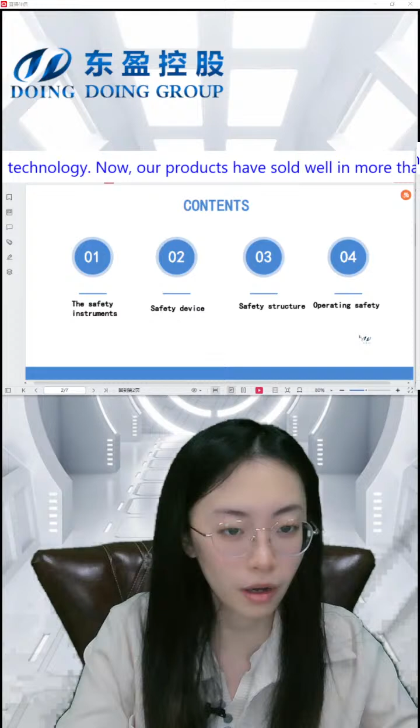Okay, let's have a look at some safety devices. We have 4 steps: the safety instruments, safety devices, safety structure, and operating safety. These 4 steps ensure we have a safe environment for production. The first is the safety instruments.

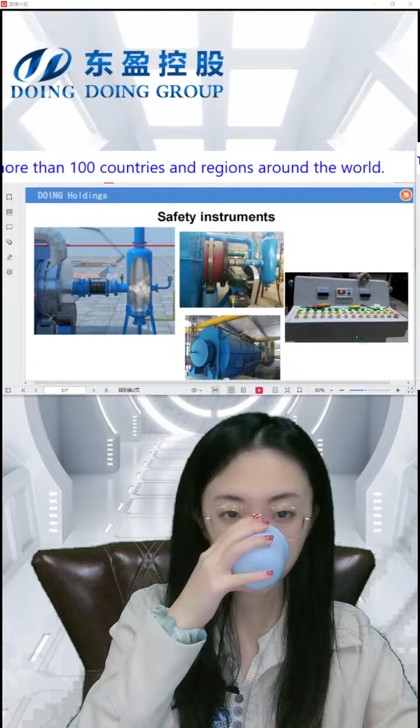Like this, this is a tube, because the gas at this outlet can move randomly. So the gas will just run randomly. So this is to control it, to protect the temperature and the pressure. And then the gas will come out from the outlet, come to the tube, then it will come to the buffer tank. The buffer tank slows down the speed to ensure it is not very fast and it can surely be condensed.

And then this is a generator, and this is the guide of the rotary furnace. Well, this is to ensure it works in one line, so there is no pressure and no release of the gas. And you can see the tube. The tube has a globe valve. This is different from the tube in the feeding system, because the gas will move randomly. So we need this valve to control it, so it doesn't escape from other places.

So these are some safety devices that you can compare between our design and other manufacturers. We are different because there are some different designs to ensure different qualities and a different safety environment.

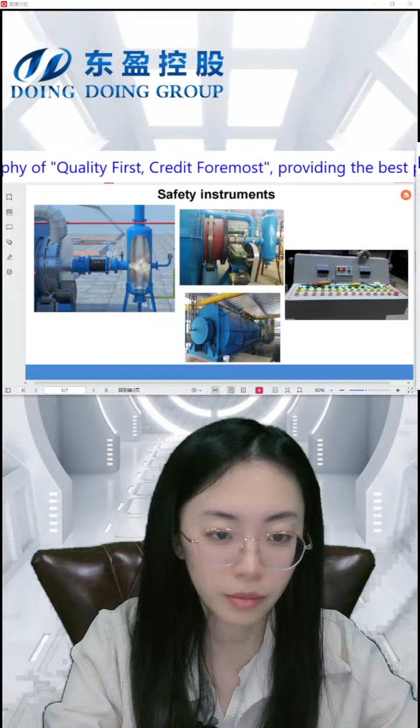And then we also have this purification system. This is a control panel, a PLC system, to ensure all the production is in controlled data, a controlled environment. So if you want more automatic equipment, you can buy this control panel. Well, this is an optional device.

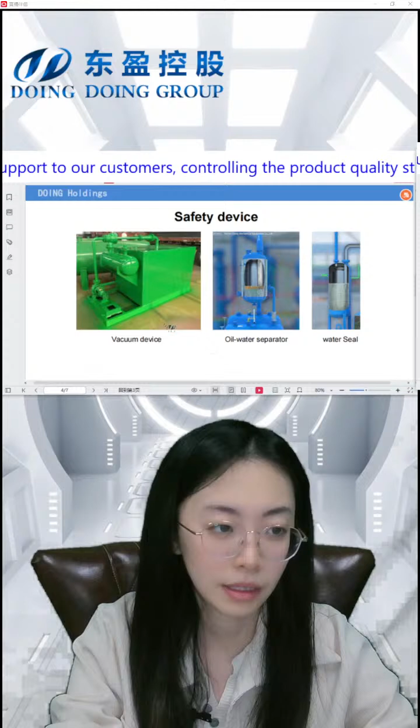And here are some different safety devices. For example, the vacuum device. Well, this is one of our patents. Because if you are familiar with this business, you may know that it is a very serious problem that some production may have a flash explosion. So we needed to solve this problem, and our engineer developed this vacuum device.

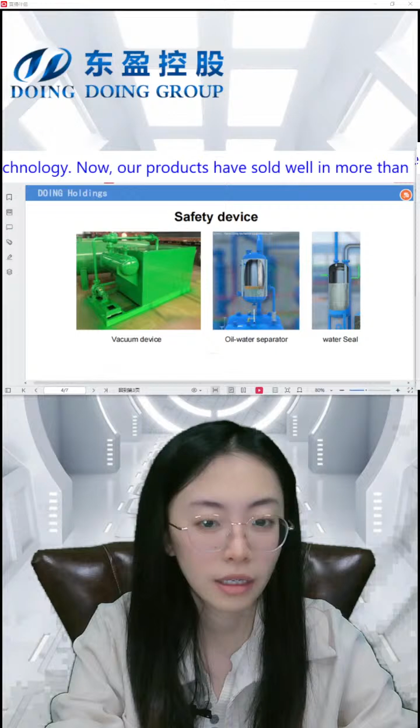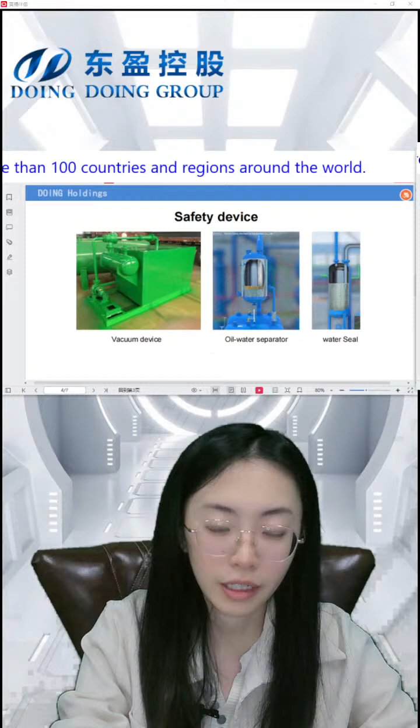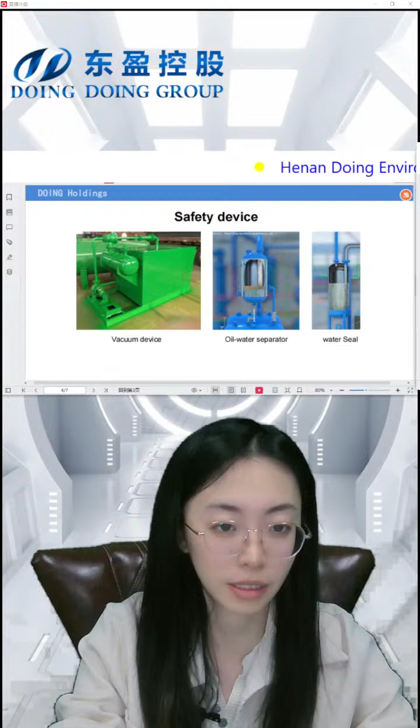This is to prevent the flash explosion by using 1 hour or half an hour to pump the flue gas released in the furnace to the purification system and the desulfurization system. And then when we open the feeding door, the discharging door after pyrolysis, no flash explosion will happen. This is why we have this vacuum device.

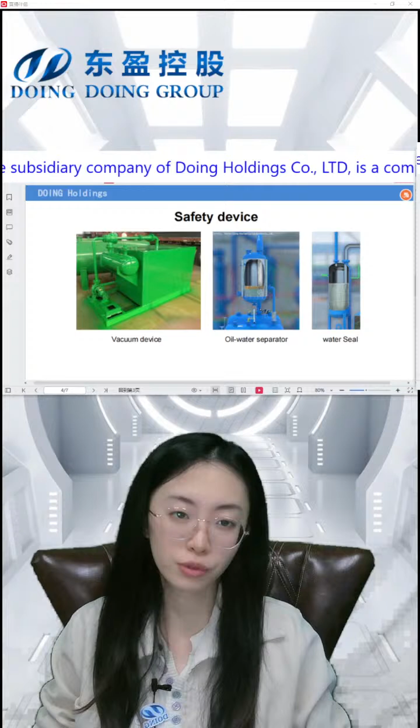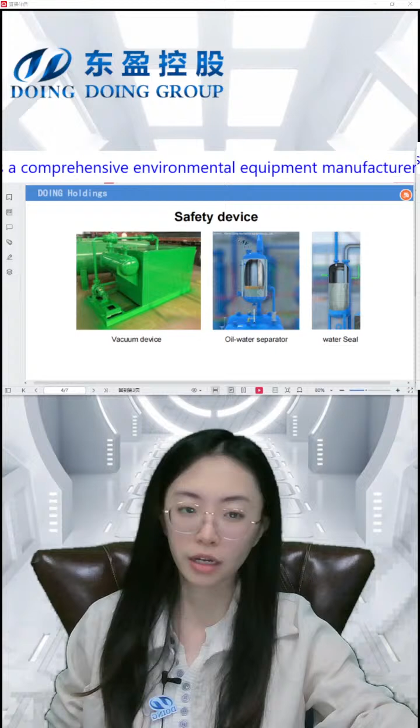And then the second is the oil-water separator. Well, it's also one of the condensation devices, but it also has the effect of controlling the safety environment. It's very similar to the water seal. It is a kind of water seal. The only difference is it has a water cover outside to condense, but inside it is the same. The oil-water separator prevents the gas from coming back to the front side of the device, which would cause safety problems like explosion. So this is what the oil-water separator does.

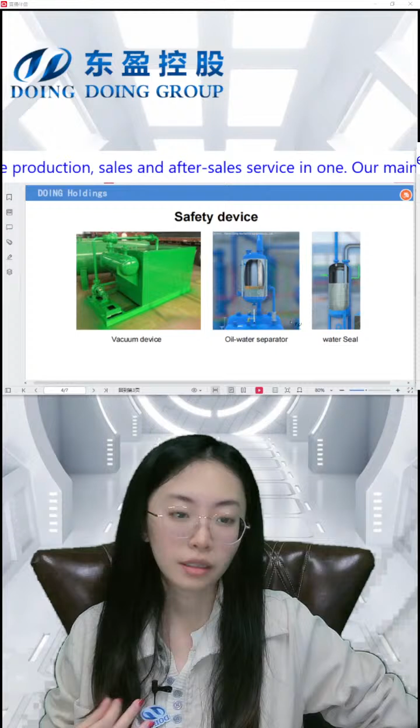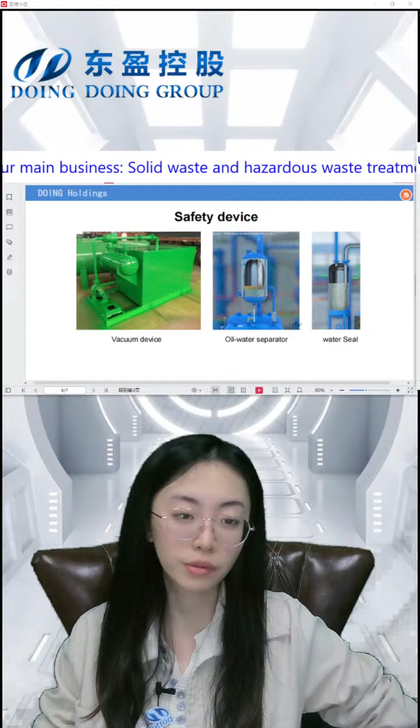First, it is a safety device. Second, it is a purification device and a desulfurization device. The oil gas will come through the water to purify the gas, to remove the particles and the dust. This is the water seal.

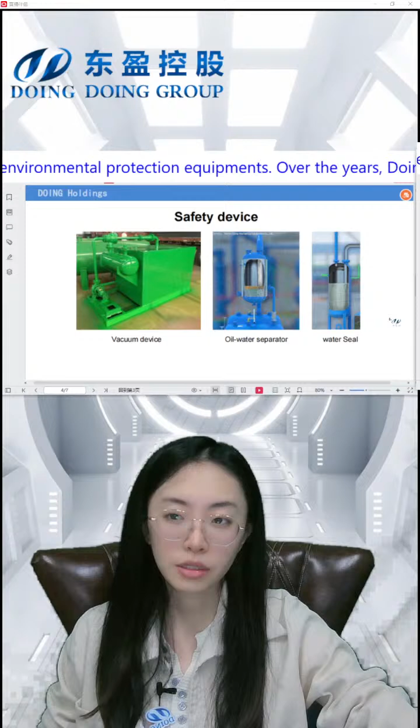And then this is the water seal. By just using the water, we prevent the gas from going back to the front device, to get a safe environment. These are some of the safety devices.

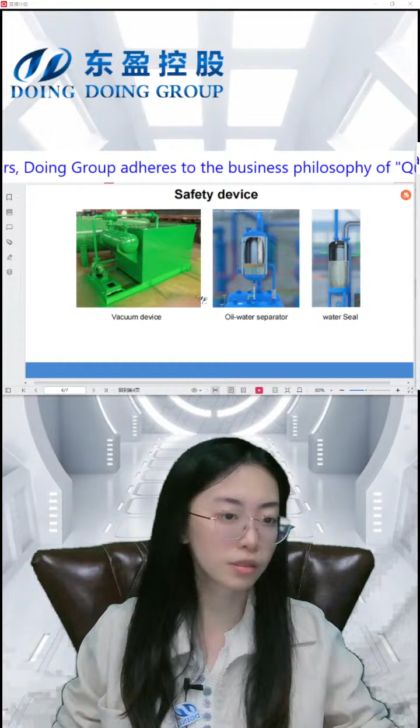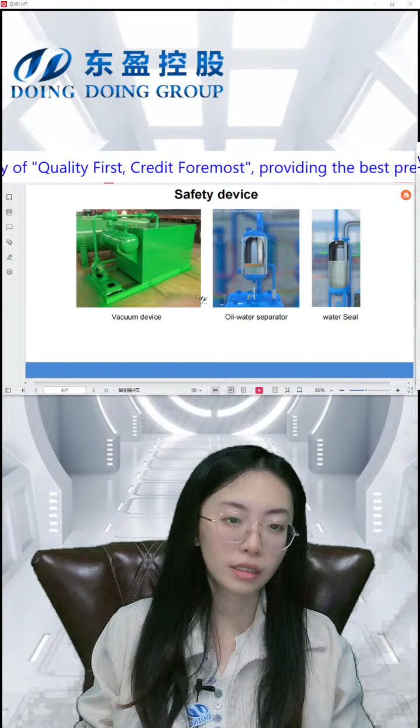Also, we have other safety devices like the temperature monitor, pressure monitor, the alarm bell, and the automatic gas pressure release device, just to ensure we have a safe environment and don't have serious problems.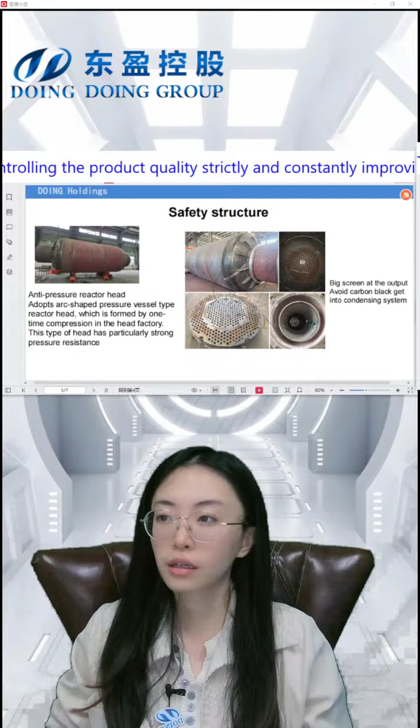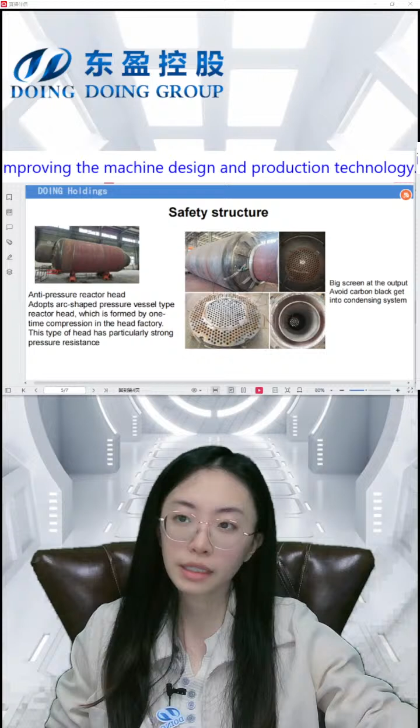And here is the safety structure of the furnace. You can have a look. This is the furnace material that we use. We can use the boiler plate or the stainless steel. The red one is a boiler plate, and the white one is the stainless steel.

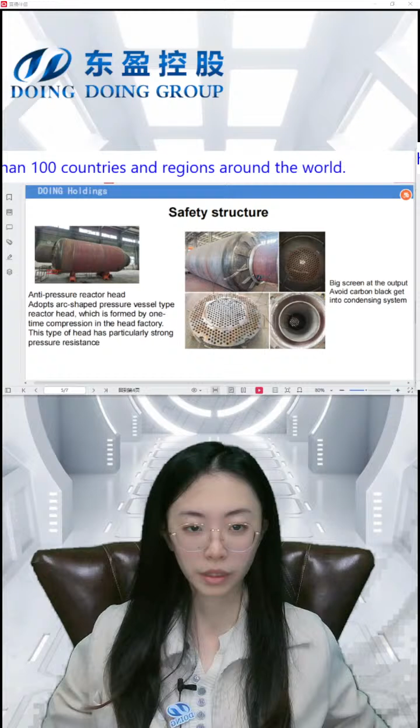Because different raw materials may have different states, and some of them may be corrosive, we need different materials. But the design is the same, to have a long service life and avoid problems of cracking, explosion, or random release of the gas. So we have this furnace, as you can see.

The anti-pressure reactor head adopts the arc-shaped pressure vessel type reactor head, which is formed by one-time compression in the head factory, also in our factory in Henan province. This type of head has particularly strong pressure resistance. This is to ensure the temperature and the pressure.

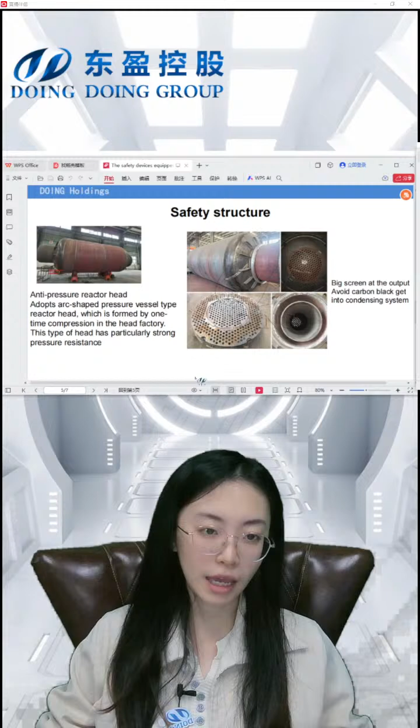And then this at the output avoids carbon black getting into the condensation system. If the carbon black comes out to the condensation system, it may clog the tube inside, because the tube is very thin. The purpose is to spray the gas so it can touch the cooling water more efficiently. But if the carbon black also comes to the condensation system, it may clog and cause safety problems.

What is this? This is the equipment of the waste tire, waste plastic pyrolysis plant. We can recycle waste like tire, plastic, oil sludge, and coal tar sludge by using the pyrolysis equipment, and we can get the fuel oil, the carbon black, and the steel wire from it. So this is what our equipment can do.

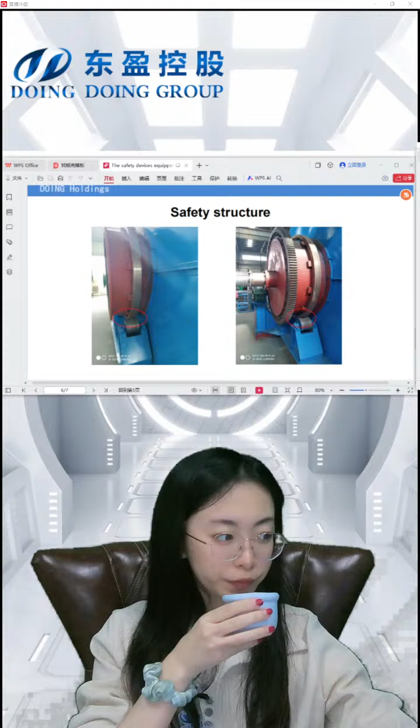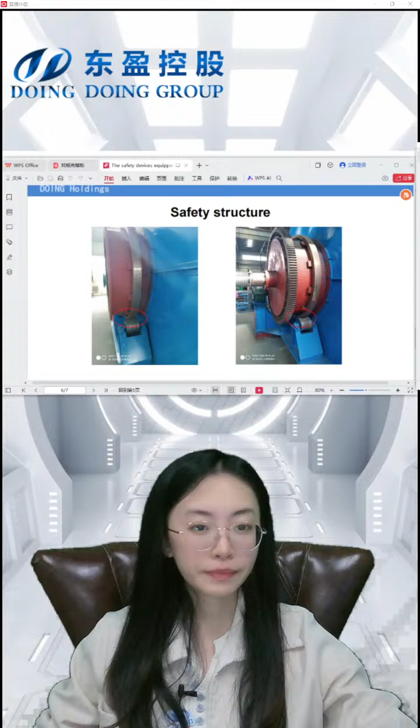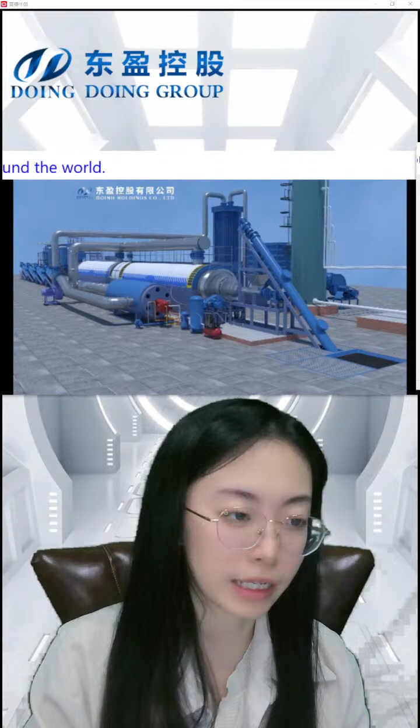Okay, and then let's have an introduction to the different kinds of equipment. We have 3 kinds of equipment: the batch type, fully continuous, and semi-continuous. They have different designs and different advantages. Let's have a look. This video explains our fully continuous pyrolysis equipment, and this is the feeding system, cooling system. This is the pyrolysis system, and this is the purification system.

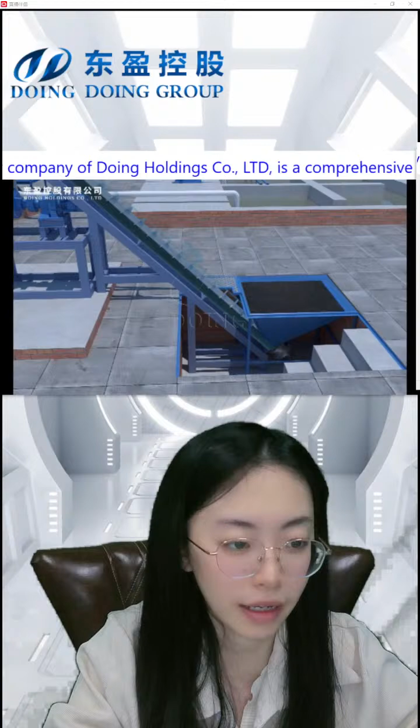Rubber powder with a diameter of less than 1 to 2 millimeters is conveyed to the horizontal feeding auger by the rubber powder lifting screw conveyor here, and then conveyed to our reactor for heating.

This is the furnace. The furnace of the reactor adopts the indirect heating design, with flame heating air, and the air heating the equipment. This not only protects the reactor inner body and prolongs the service life of the equipment, but also heats more evenly. And this is a hot wind furnace. Also, the purpose is to get the heating energy more evenly.

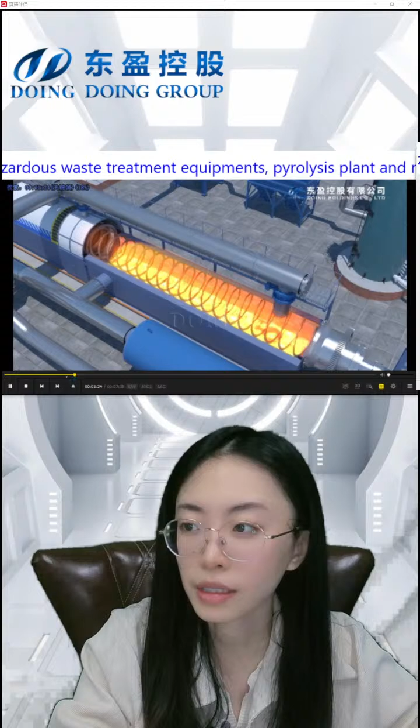You can see this furnace; we changed the traditional burner system. Previously our heating system was the burner and the tail gas burner. We use this new design, the hot wind burner, which has the advantage of uniform heating. And there is an optional semi-automatic or automatic control system, so it realizes automatic temperature control, pressure control, and fire control. It's more convenient and more efficient.

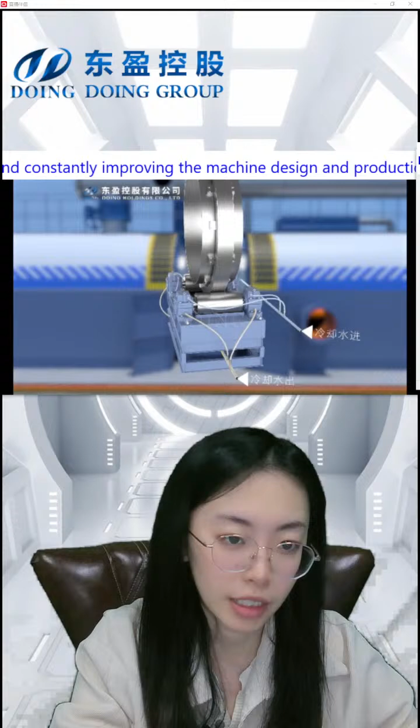And there is a cooling circulating water device here under it to cool the lubricating oil, thus protecting the supporting wheel.

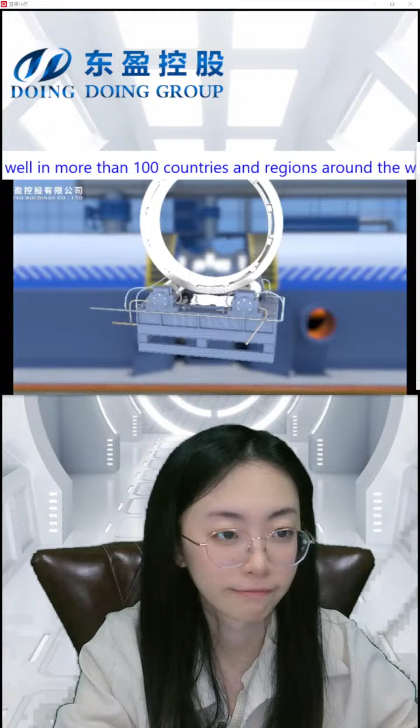And then the back of it is the gas outlet. You can see here, the green part is our fixed section, through which oil gas enters the buffer tank upwards, and the carbon black falls back to the slag discharging system from the bottom. And this is the buffer tank, which is used to slow down the gas and to precipitate the impurities.

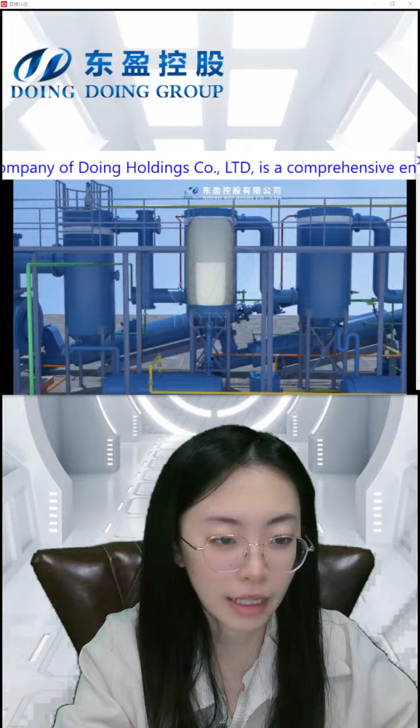And next, we come to the buffer condensation tank. We have 3 buffer condensation tanks to further precipitate the impurities and to have a buffer effect. Outside is a water jacket, which is for the condensation effect. The water covering outside is to cool down this flue gas. This is the U-tube design, which is used to balance the pressure and prevent oil gas from entering the oil tank during pumping. We have the 2-ton oil storage tank.

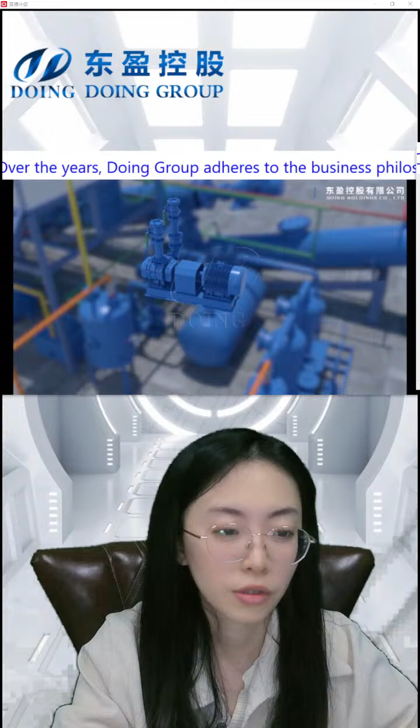And then we come to the vertical condensers, which are used to increase the cooling area and to ensure all the oil gas is cooled down. They have several tubes inside. We have 3 vertical condensers. And then the gas will come to the water seal to prevent the tail gas from flowing backwards.

And then all the gas is condensed, but we also have some gas that can't be condensed. It comes to the optional environmental protection device, the tail gas desulfurization equipment. This is if you want to reuse the tail gas that you produced; the gas can be the heating energy. It can save your extra heating energy, but we need to purify it, or it has some bad smell. So we can have this tail gas desulfurization system. It's also our patent.

Inside is circulating water containing sodium hydroxide, which reacts with the tail gas to remove the hydrogen sulfide. Here is the buffer tank, and then these 2 spraying towers will spray the sodium hydroxide.

We use extra tail gas to generate electricity. Our tail gas power generator system heats the boiler with purified tail gas. And the steam generated by the boiler supplies energy to the equipment through the steam generator. It can improve the utilization rate of the tail gas, save heating fuel, improve efficiency, and reduce the operation costs.

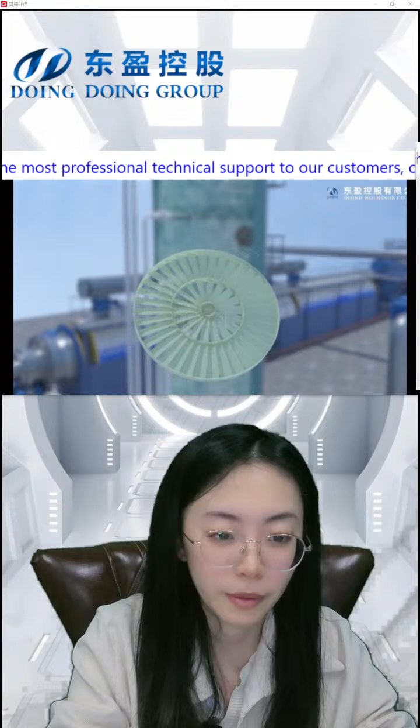The flue gas has been cooled to below 120 degrees when it enters this part. This is the air equalizing device, and this is to disperse the flue gas and make it contact with the spraying tower mist more evenly.

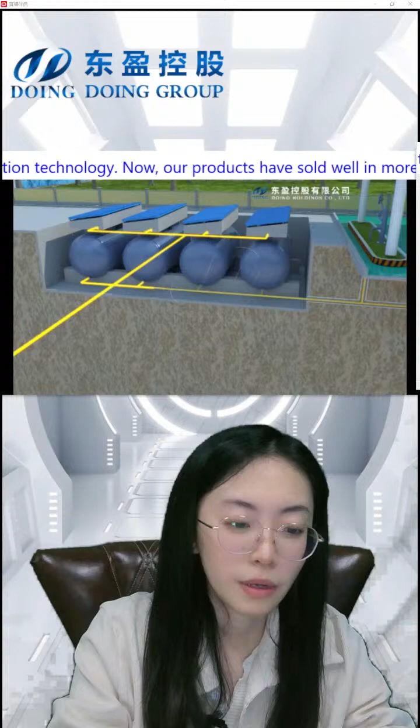And the last is the automatic oil pumping system for the fully continuous equipment. We can collect the oil, then we can load it directly, or we can use it as heating energy at glass factories, brick factories, or other kinds of factories. So this is what our equipment can do.

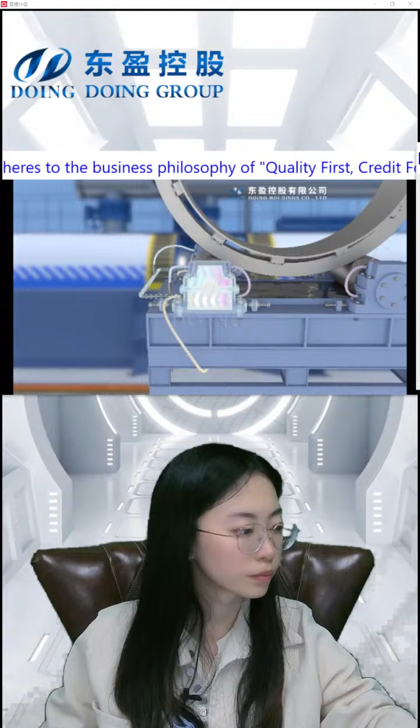Okay, now let's have a look at the semi-continuous pyrolysis plant. Let's give you some 3D video and pictures to know more information about this.

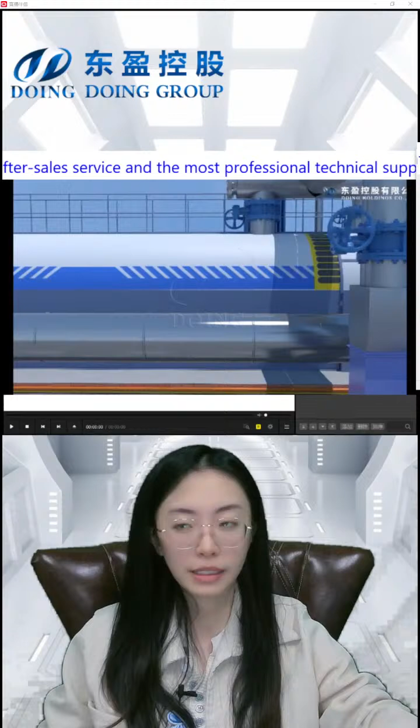So you can see here the production line of the semi-continuous equipment. We also need some pre-process to crush the tire into particles. The rubber blocks will be a diameter below 30 millimeters, and will come to the reactor through the feeding screw conveyor.

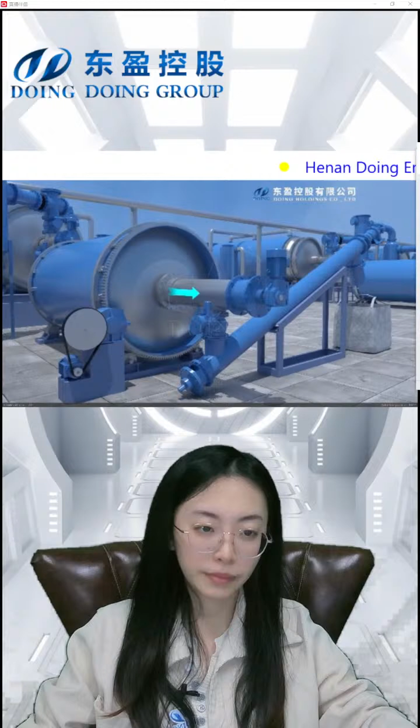It also has different sections: the pre-processed section, the feeding system, the desulfurization system, pyrolysis system, cooling system, and discharging system. Then we can also get the fuel oil, carbon black, and steel wire from the pyrolysis equipment.

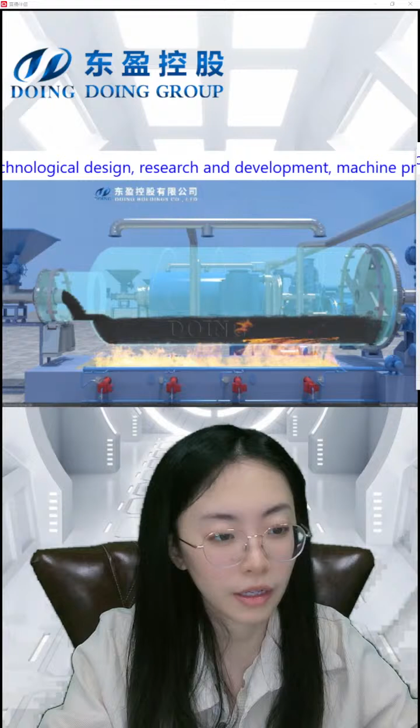So let's come back from the very beginning. See the semi-continuous one, you can see it's very familiar with the batch type. This shows a 15-ton pyrolysis plant. We use the feeding system by using the feeding conveyor to feed it into the reactor.

The heating system of the reactor is equipped with 300,000 calorie burners. There is a tail gas burner next to each burner. It will heat for about 2 hours, and the temperature will gradually rise.

The oil gas will be produced at 120 to 160 degrees, a white gas of the mixture oil gas and tail gas.

And then this is the carbon black, it will discharge in a small reactor. The carbon black can be discharged at high temperature, so it saves the cooling time of the reactor.

Generally it cools to a certain temperature and will be packed and discharged. The slagging discharging system is connected with the lifting screw conveyor, and the carbon black is discharged to packing the bag directly.

You can see here is a reactor. By using the lifting screw conveyor, it will be packed. And then it comes to the buffer tank, which plays the role of slowing down the gas and settling the impurities.

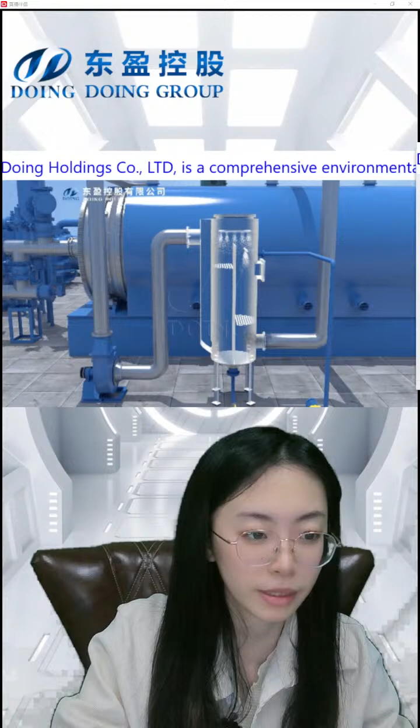This is the optional device.

Then this is the water film dust system, which is our standard flue gas purification device, which purifies the flue gas. The desulfurization tower can be chosen by the customer themselves, it's also an optional device.

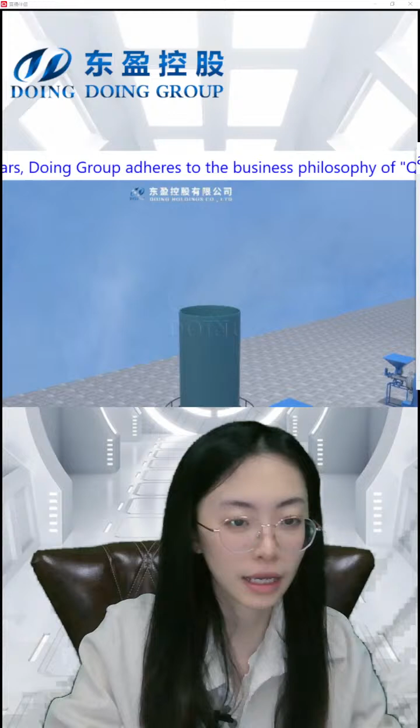And then the gas can be released to the different regional standard, because different provinces in China and different countries all over the world have different standards for gas release and production devices. So we have different programs for you.

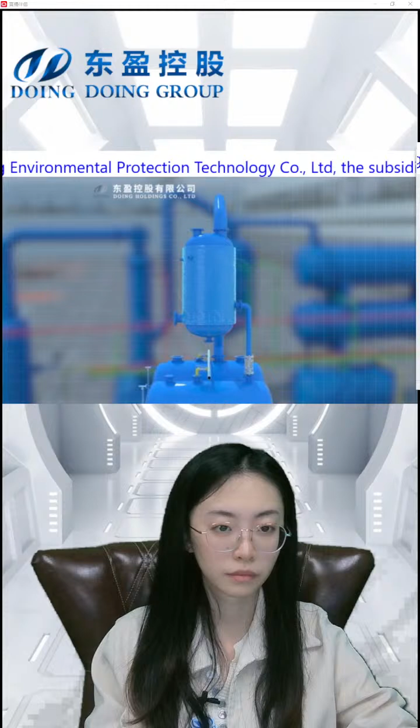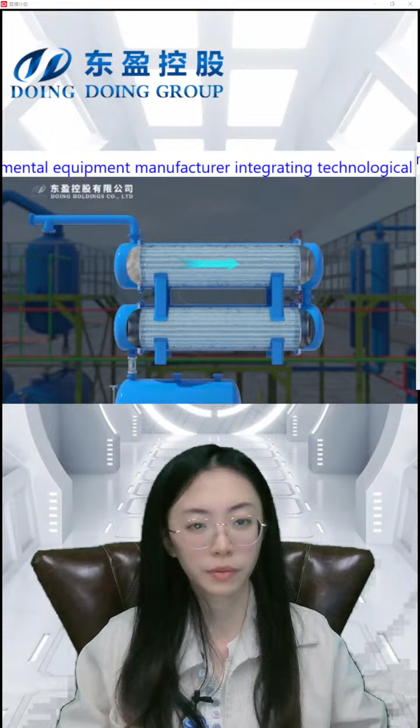We have 2 designs. In the batch type, the fully continuous one, it shows us a water tank, and then here are the tube condensers. They have different advantages. If you want more information, you can contact our sales manager and we will give you the introduction.

This is also the purification system, the odor removal system to remove the hydrogen sulfide in the gas, and then the tail gas, which can return to the reactor, has heating energy.

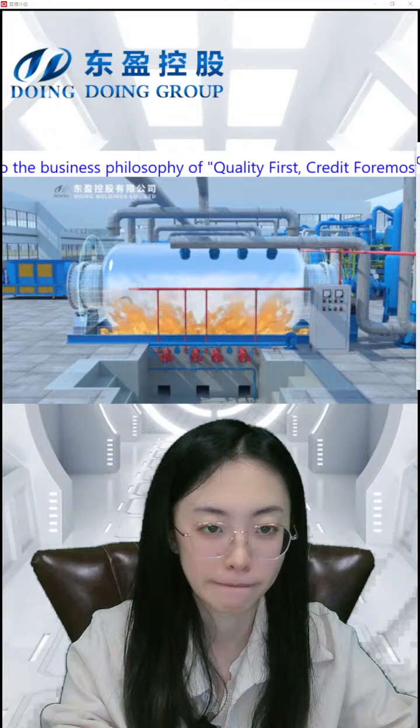So this is its return here. And then this is the desulfurization system, same as the semi-continuous and fully continuous types. We use the spraying tower to purify the bad smoke inside.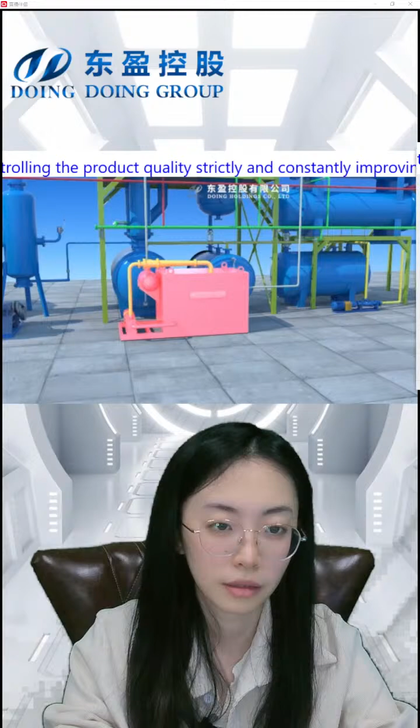This is the carbon black. And this is just a safety device that we introduce: the vacuum device, just to prevent the explosion.

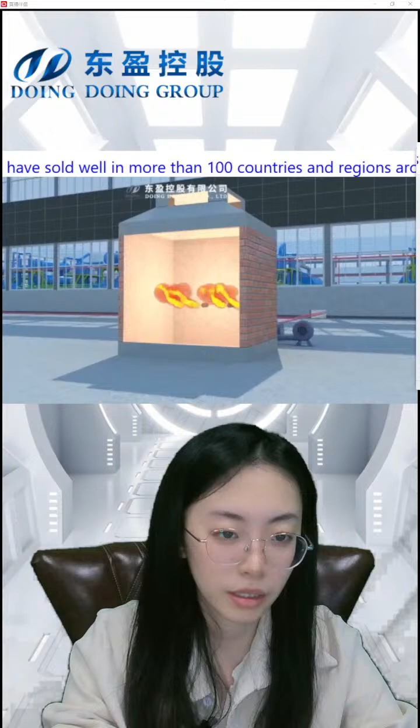Here is the burning chamber, where the extra tail gas can burn directly. The smoke is not released randomly; it also goes through a purification system.

And then this is the cooling system, cooling the furnace for high efficiency. If you just cool naturally, you need to spend 10 hours to reach a normal temperature.

Then this is the discharging system. We have 3 ways to discharge the carbon black for the batch type pyrolysis plant: the front slag, side slag, and back slag. All can be used to discharge it.

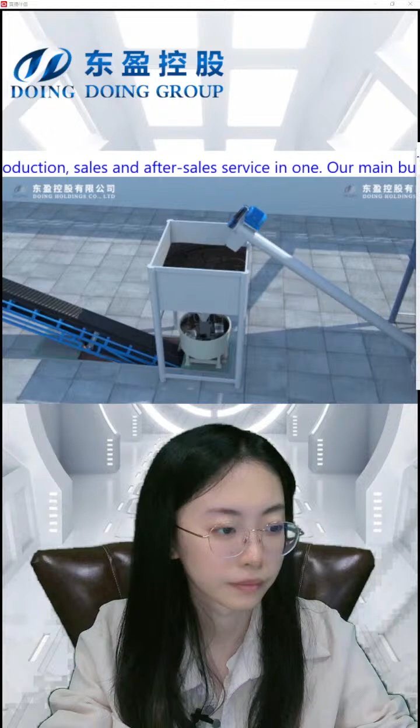And then this is the carbon black processing system. We use it to discharge and do deep processing of the carbon black. The carbon black has high heating energy; it can be used to replace coal, with more than 3,000 kcal.

Welcome our new friends. Then we just need to pull out the steel wire by using this machine, or use the forklift, or by worker.

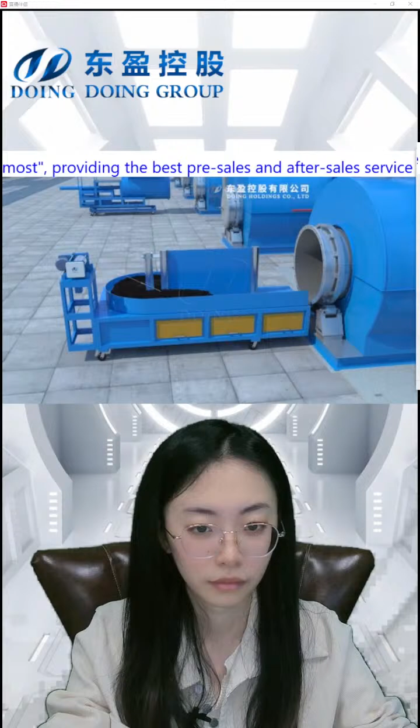Last, this oil tank is 2 ton. The last step is to pump the oil.

Let's come back from the very beginning and give you a detailed introduction of different steps. This is a production line in the factory.

This is the first step, the feeding system. It uses an automatic feeder. The feeder is a hydraulic structure of 50 tons. It takes 2 workers to use the automatic feeder, about 1.5 to 2 hours to feed it, and it takes 4 workers 3 to 4 hours manually.

And this is the combustion system. It is equipped with 4 burners and 4 tail gas burners. By heating for 2 hours, the gas will come out.

After the oil gas comes out from the outlets, it goes to the buffer tank, which will slow down the gas, make it stay in the cooling system longer, and ensure the carbon black is settled down.

The cooling system has 4 steps. The first one is here, the vertical condensers. It's the first cooling stage, and they have 4 tubes in it.

Each condenser has 108 millimeter pipes. The pipe is surrounded by circulating cooling water. And this is a 2-ton oil storage tank for the first cooling line.

And then we come to the third cooling system, the horizontal condensers. We have 2 horizontal condensers, each with 68 millimeter pipes, which generally increase our cooling area and ensure that most of the gas is cooled after this 3rd cooling system. The cold oil is temporarily stored in the sludge tank.

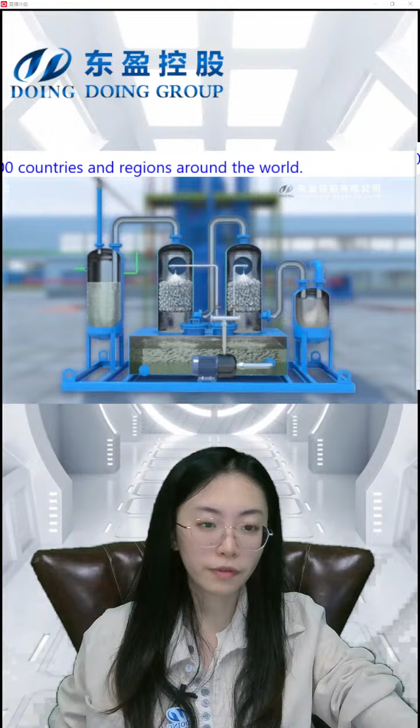The non-condensable gas from the condensing tower, the tail gas, enters the standard safety device, the water seal, which prevents the gas from flowing backward. Here is the water seal, and behind it is the environmental protection device.

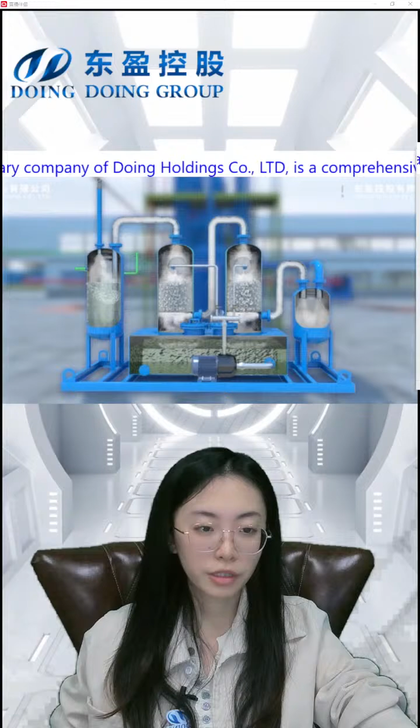We select the purification of the tail gas. Sodium hydroxide is added to the water to purify the odor of the hydrogen sulfide. This is a spray tower, and this is the buffer tank, the water seal. The purification fluid filter inside here is used to disperse the gas.

The purified tail gas is recycled to the reactor through the pipeline to heat the furnace. This is the environmental protection device we have selected for removing the sulfur dioxide and other bad particles in the gas that we need to release.

This is also a different program of our purification system, and here we can give you a more detailed introduction. This is our patent, called the vacuum device.

It takes half an hour to an hour to pump the residue oil gas out of the reactor, and then it is pumped into the horizontal condensers to be condensed into oil again. If the residue oil gas density is very high, it will be very dangerous when we open the starting door randomly - it may burn and cause a flash explosion. So we use the vacuum device to protect and control the safe environment, and it can also ensure the oil yield.

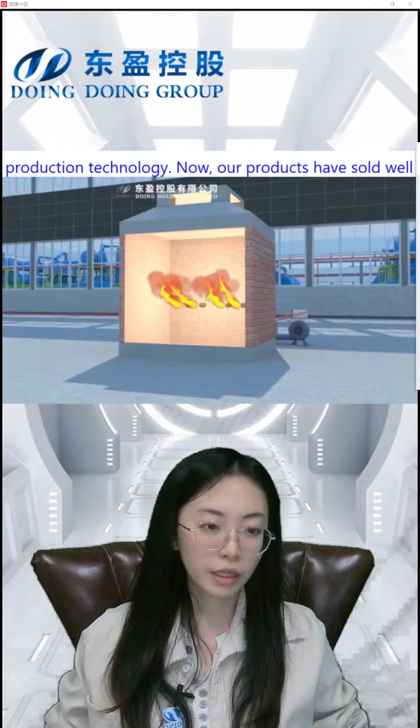This is the burning chamber. The extra tail gas can burn here. And then it comes to the air cooling system of the reactor.

This is the side slag of the discharging system, and it has 2 advantages. First, it has high efficiency - now we can slag twice in one batch. Second, they directly discharge the carbon black underground to prevent the carbon black from flying and polluting the workshop.

And then the carbon black will go through the transportation system for deep processing. This is the batch type pyrolysis plant, a deep structure of it.